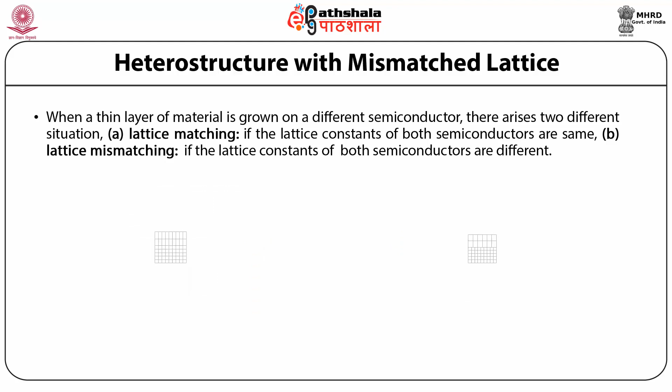This figure shows a kind of heterostructure where a top thin epitaxial layer is strained to adjust its lattice constant to the underlying semiconductor. So in the case of a lattice mismatched heterostructure, the epitaxial layer that has a significantly different lattice constant will be forced to adjust to the lattice constant of the bottom layer if the lattice mismatch is less than about 10%. So when the top epitaxial layer adopts the lattice constant of the bottom layer, it becomes strained. That is, it is either compressed or expanded from its usual lattice structure in bulk.

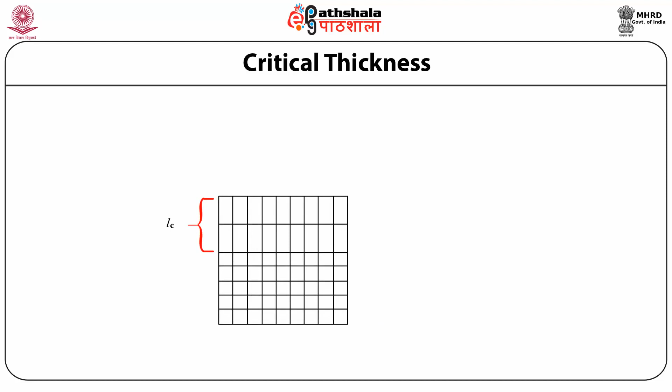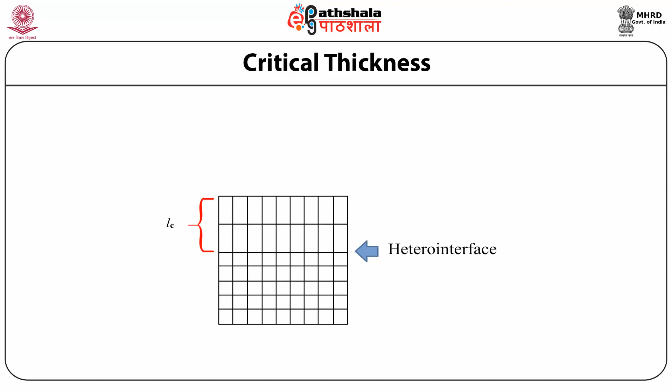So there exists a maximum thickness of the thin layer below which the lattice mismatch can be accommodated through strain, as evident from this figure. So there is a critical thickness that is indicated by LC. For layer thickness above the critical thickness, the lattice mismatch cannot be accommodated through strain, resulting in dislocations at the heterointerface. When the thickness of the top layer is less than the critical thickness, the strained layer can be in either compressive or tensile strain, which is homogeneous within the layer.

So if the lattice constant of the top layer is less than that of the underlying layer, the heterostructure will be in tensile strain, and if the lattice constant of the strained layer is greater than that of the underlying layer, the heterostructure will be in compressive strain.

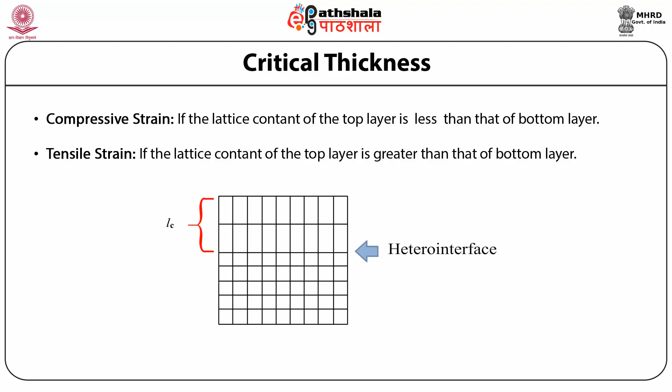Stress tensor. Now strain is a measure of the change in length due to small deformations caused by an applied force per unit area known as stress. The stress and strain are tensor quantities which have 9 components that describe the relative stress and strain along the principal directions of the crystal. So the stress vector Pn acting at a point P on a surface with unit normal vector n is defined as Pn equal to the limit as A tends to 0 of F by A, where F is the force and A is the area of the surface.

So the stress vector can be written as Pn equal to sigma n, where sigma is the stress tensor and n is the normal vector, and by expanding the above equation we get P1 equal to sigma 11 e1 cap plus sigma 12 e2 cap plus sigma 13 e3 cap. P2 is equal to sigma 21 e1 cap plus sigma 22 e2 cap plus sigma 23 e3 cap. And the P3 component is given by sigma 31 e1 cap plus sigma 32 e2 cap plus sigma 33 e3 cap.

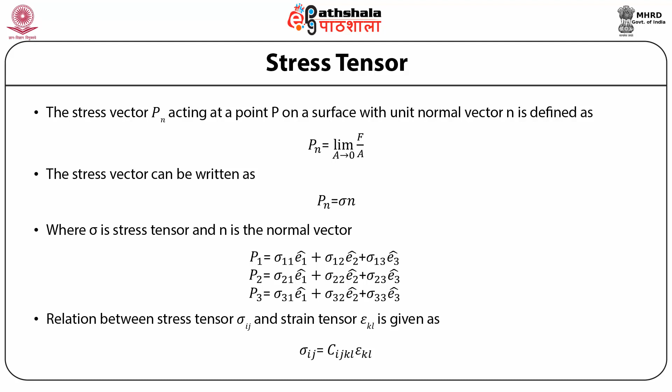So now let us come back to the relation between the stress tensor sigma ij and the strain tensor epsilon kl, which is given as sigma ij equal to Cijkl epsilon kl, where the index i indicates the direction of the component of the force per unit area on a plane whose normal is parallel to the Ej direction. Cijkl is the elasticity tensor, which can be simplified by some inherent symmetries that reduce the number of independent components of C.

So the components of the elasticity tensor must obey that Cijkl should be equal to Cjikl, equal to Cijlk, and equal to Cjilk. So when a unit volume element is reversibly deformed by differential strain increment d epsilon ij, then dw equals sigma ij multiplied by d epsilon ij, equal to Cijkl multiplied by epsilon kl multiplied by d epsilon ij.

So for an isothermal system, dw equals df, and df is equal to Cijkl multiplied by epsilon kl multiplied by d epsilon ij, and we get that del square f with respect to del epsilon ij del epsilon kl equals del square f with respect to del epsilon kl del epsilon ij. Now here we have used that Cijkl must be equal to Cklij, which implies that C is symmetric along the diagonal.

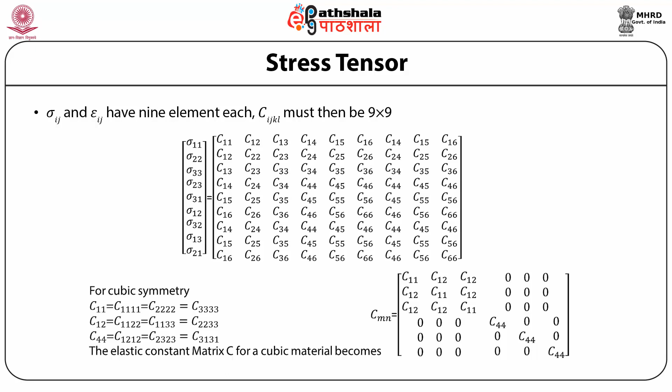Stress-induced polarization in semiconductor heterostructures. A polarization field can be produced within a material when a stress is applied to it. This is known as the direct piezoelectric effect and can be expressed mathematically as Pi equals dijk sigma jk, where the components of d are called the piezoelectric moduli. So the above equation implies that each component of P depends upon all the components of sigma.

So P1 given by this equation can be expanded by varying i, j, k from 1 to 3 and summing all those combinations. Similar equations can be written for P2 and P3. Using the repeated index notation, it can be written in a much simpler and compact form as P1 equals d1jk sigma jk, where as usual there is an implied sum over both the indices j and k on the right hand side.

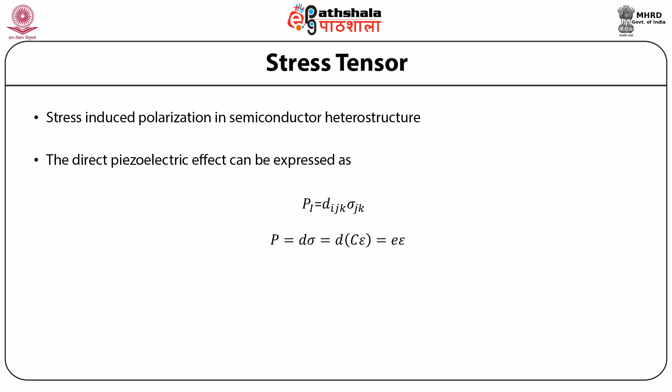It is useful to relate the polarization field P to the strain epsilon. So in matrix form, P can be written as P equals d multiplied by sigma, equal to d multiplied by C epsilon, equal to e epsilon, which in component form is Pi equals dijk Cjklm epsilon lm equal to eilm epsilon lm.

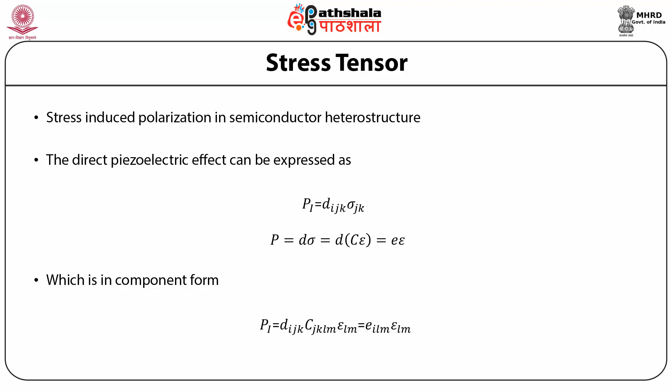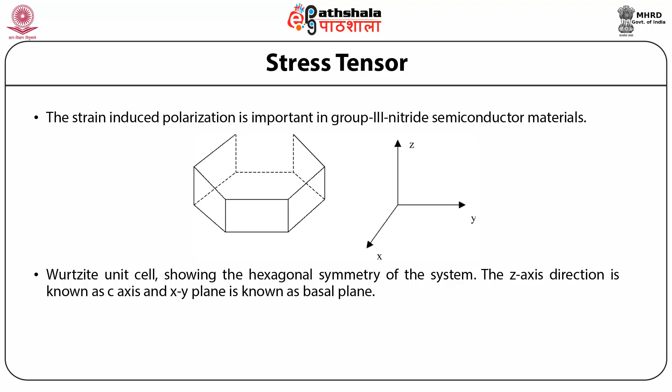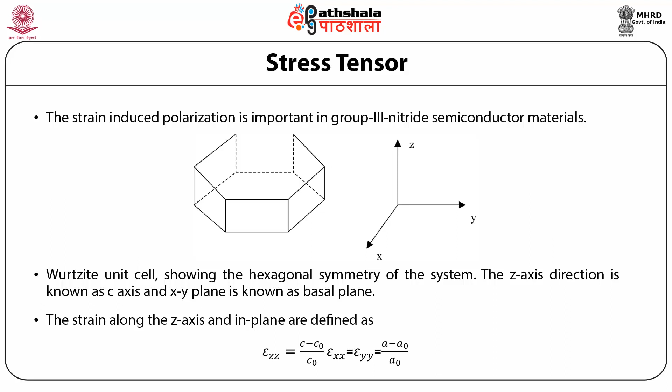So the lattice constant along the z-axis c and in plane a are generally different. The strains along the z-axis and in plane are defined as epsilon zz equal to (c minus c0) by c0 and epsilon xx equal to epsilon yy equal to (a minus a0) by a0, where c0 and a0 are the lattice constants in the unstrained system and c and a are the lattice constants under the strain conditions.

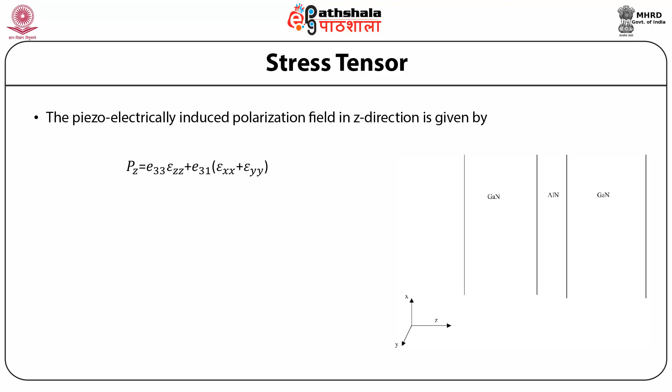The piezoelectrically induced polarization field in the z direction is given by Pz equal to e33 epsilon zz plus e31 (epsilon xx plus epsilon yy). So the strain caused by compression or expansion of the crystalline lattice from its unstrained condition either pushes ions together or pulls them apart. In either case, the local dipole moments are different, resulting in a change in the macroscopic polarization vector P.

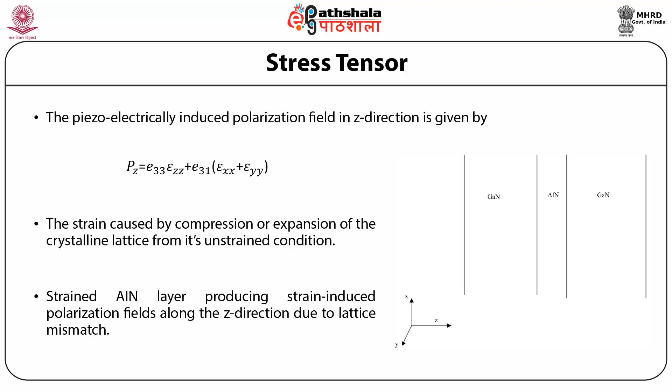So the figure over here shows a thin layer of aluminium nitride sandwiched between two GaN layers. Due to the lattice mismatch between aluminium nitride and GaN, the aluminium nitride layer is strained, resulting in strain-induced polarization fields along the z direction. So this shows a three-layer system, and here the lattice mismatch of the system is accommodated by straining the thin aluminium nitride layer. And the thickness of the aluminium nitride layer should be less than the critical thickness, which for aluminium nitride is about 3 nanometers. A polarization field P is produced along the z direction.

So now one can define the electric displacement vector D, which is given by D equal to epsilon0 E plus P, where epsilon0 is the free space dielectric constant, and D can be obtained from Poisson's equation, that is del dot D equal to rho, where rho is the charge concentration. So this equation can be modified by putting in the value of D: del dot (epsilon0 E plus P) equal to rho. Rearranging this equation and defining the polarization charge rho Pz yields del dot epsilon0 E equal to rho minus del dot P, which is equal to rho plus rho Pz. So the polarization vector P can be obtained from del dot P equal to minus rho Pz.

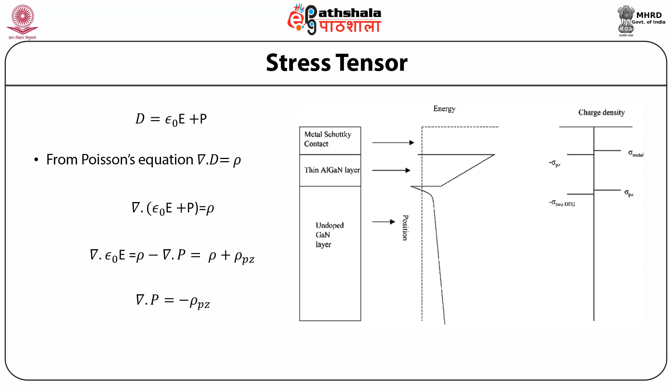As the strain condition changes abruptly at the two heterointerfaces in the GaN/aluminium nitride/GaN structure, the polarization vector changes across the interface. So this equation implies that there exists a polarization charge at the interface. One side of the heterointerface has a positive charge, while an equal but opposite negative charge is produced on the other side.

Now this figure A, the left hand side figure, shows the AlGaN/GaN based heterostructure with a metallic Schottky contact to the AlGaN layer. And the second figure shows the energy band profile of the heterostructure with a triangular quantum well at the GaN/AlGaN interface. And lastly, we have the charge density at the interface.

So, the strain-induced polarization field can be used to change the local carrier concentration near the heterointerface. In this system, a Schottky metal gate contact is formed on top of a thin AlGaN/GaN heterostructure, and the thin AlGaN/GaN structure is strained, resulting in a polarization field which induces a polarization density sigma Pz at both interfaces of the AlGaN layer. So the polarization charge density at each interface is compensated by the charge density in the top metal Schottky barrier and in the bottom GaN layer.

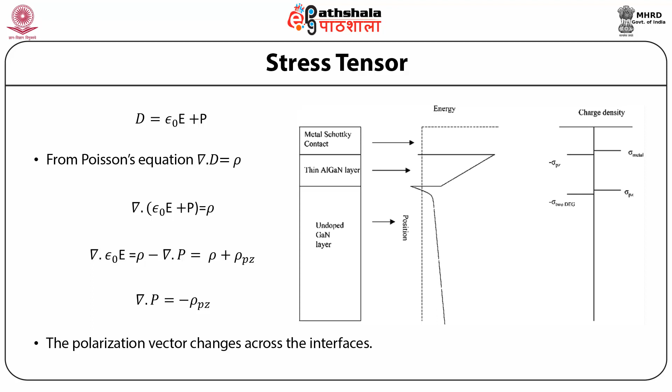Group III nitride semiconductors exhibit spontaneous polarization due to non-ideality of the crystalline structure. The c by a ratio deviates from its ideal value, resulting in a difference in the bond length and dipole moment charge. Now, when the spontaneous polarization is aligned, the net polarization is given by P equal to P Pz plus P spontaneous. So the combined action of piezoelectric and spontaneous polarization fields can be used to change the free carrier concentration.

So students, let us summarize what we have learned in this module. First, we discussed the critical thickness. When the thickness of the top layer is less than the critical thickness, the strained layer can be in either compressive or tensile strain, which is homogeneous within the layer. Secondly, the stress and strain tensors were discussed, and they have 9 components that describe the relative stress and strain along the principal directions of the crystal. Next, we discussed the mathematical description of the direct piezoelectric effect leading to stress-induced polarization, where a polarization field can be produced within a material when a stress is applied to it.